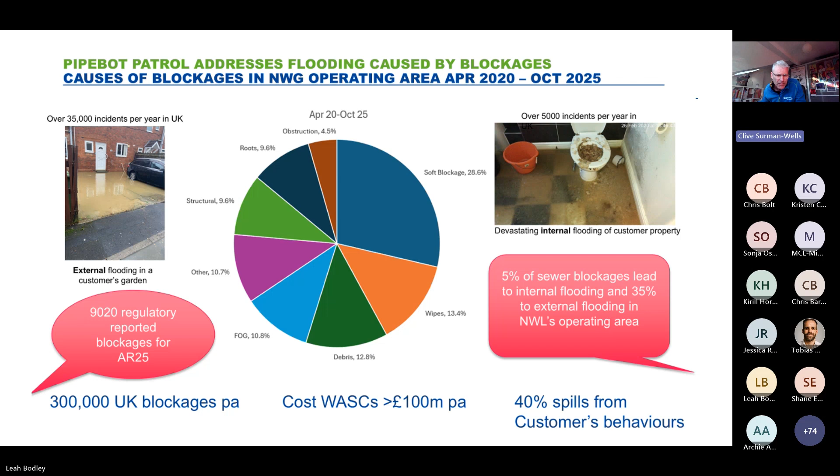So it's not like we don't do anything to address this problem - we've been working on it for years, and a number of fairly effective approaches have been adopted over the years. For example, behaviour change campaigns is one way of addressing blockages. Our Northumbrian Water's own Bin the Wipe campaign encourages people not to put wipes down the toilet. But of course, not everybody complies with a behaviour campaign, and they need constant endorsement - eventually their effectiveness wears off if they're not reinforced.

Another approach to dealing with blockages: if we have an area where there's a blockage hotspot and we have frequent problems, we will create a planned preventative maintenance and routinely send out a team to look in the manhole on spec to see whether the blockage is building up there or not. And of course, that's quite wasteful of resources, because often we'll go out to a site and find that there is no blockage, and therefore that journey was a wasted journey. And blockages can occur in between these speculative inspections.

The final approach that we have is using predictive models. Most water companies will have sewer level monitors, quite large networks in some cases of sewer level monitoring devices. That's a gadget in many manholes that is measuring the water level. And if you see water levels rising at one point, but not rising downstream, then the chances are that there is a blockage between those 2 points. So that's giving new insight. It's allowing teams to react and get out and try and deal with those blockages.

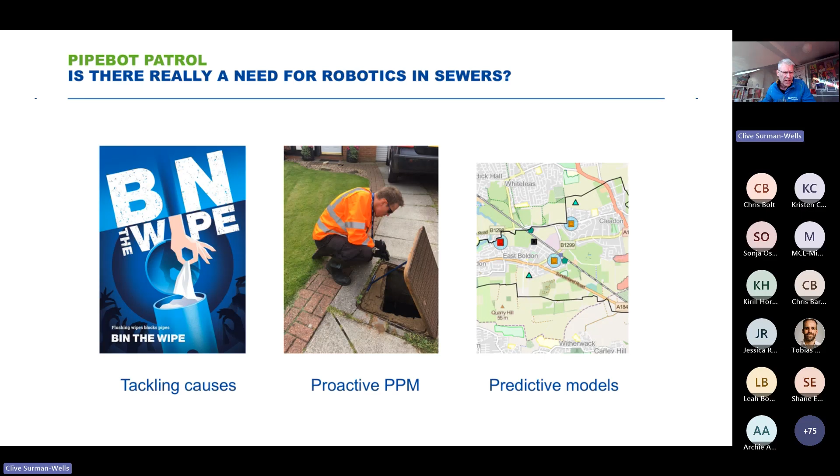Now, we came up with this vision really by talking to the people involved within Northumbrian Water and across the water industry in dealing with blockages and preventing flooding from happening. And the message we were receiving was, if only we could determine the precise location of debris buildup before it actually caused a total blockage that was going to lead to flooding, then we'd have enough time to get out to site to solve the problem and clear it before the heavy rainfall came, for instance. So if we could monitor it in some way and monitor everywhere all of the time, that would be great.

So that seemed like a challenge to us, and we threw our mind to the world of films like Thunderbirds and Disney Pixar's Wall-E, and came up with the concept of, what if we had a sewer crawling robot that literally lived in the sewer and monitored a particular sewer zone the whole time, 24/7, and alerted us to the buildup of debris. That would mean we would learn a huge amount about how a particular sewer zone functioned, how blockages occurred and what they were made of, how they moved through the system, and how they eventually became full blockages, and over what period of time. It will give us a completely new visibility of how that occurred.

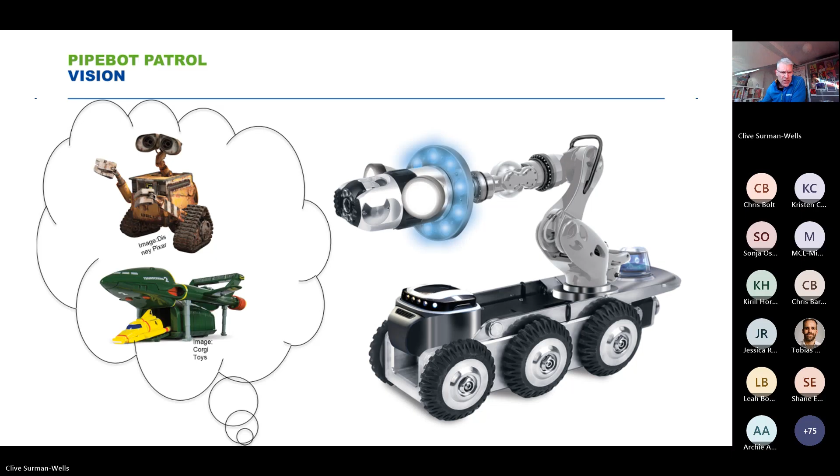So that was our concept, and we thought, well, we could invent a robot that did this. It would have to work autonomously and live in the sewer, as opposed to being put in and controlled by humans. So that is the concept that we came up with, and we converted it into a bid in the Ofwat Innovation Fund, the Water Breakthrough Challenge, 2 rounds ago. And we put forward a proposal to develop this autonomous sewer crawling robot, which is component number 1, that would live in the sewers but would have a dock in a manhole or inspection chamber. That's component number 2. And we could see what it was doing all of the time through a dashboard that would tell us precisely where the build-up was. That's the human interface, the third part of the system.

There was a fourth part of the system in the bottom left that's greyed out, and this is tools for clearing blockages. So we decided to draw a line in our project over blockage clearing and make this first phase of the project about proving the concept that a robot can live in the sewers and survive the harsh conditions, can alert us to the build-up early enough for us to react to it, and that we would add blockage clearing tools in a future phase so that we could actually tackle maintenance of the sewer as well, as opposed to just alerting a human team to come and deal with the blockage at this stage. There's a couple of things to point out on here as well.

That's that big black line that goes between the inspection chamber with a reel in it and a line which is a tether that goes to the robot. So in the first instance of the project, although the future vision was that it should be completely free to roam and perhaps battery powered, in the first instance it should be tethered for a number of very good reasons. But I was advised not to go straight to an untethered robot because it would be too ambitious at this stage.

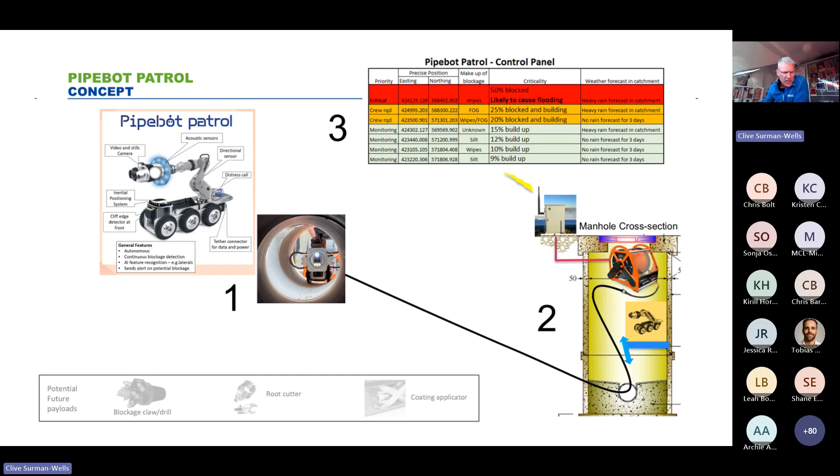The second thing you can see is above the cable reel in the manhole component 2, there's a kiosk on the ground. So if you're going to supply mains power, unlimited power, and unlimited data via a cable, you need a means of transmitting that back. So in the very first concept, the bid we put forward to Ofwat, we said that we would establish 3 zones for testing in the field once we developed the robot, and they would transmit data from a kiosk that will be established. So others in the group will say more about that as we progress on.

The good news is Ofwat Water Breakthrough Challenge did award funding of £1.6 million to the project, taking the total budget to 1.8 million because the partners obviously contribute. It's a 2-year project which started in July 2024, and the main partners in the project are Sheffield University, who are providing robot autonomy and acoustics expertise, Minicam, on whose CCTV crawler the initial concept product has been based, the CRP 140, EMS, who are used in the project to get power and data to difficult to reach places. Northumbrian use EMS for getting data and power to riverbanks for water quality monitoring in rivers, for instance, those kind of difficult to get to places.

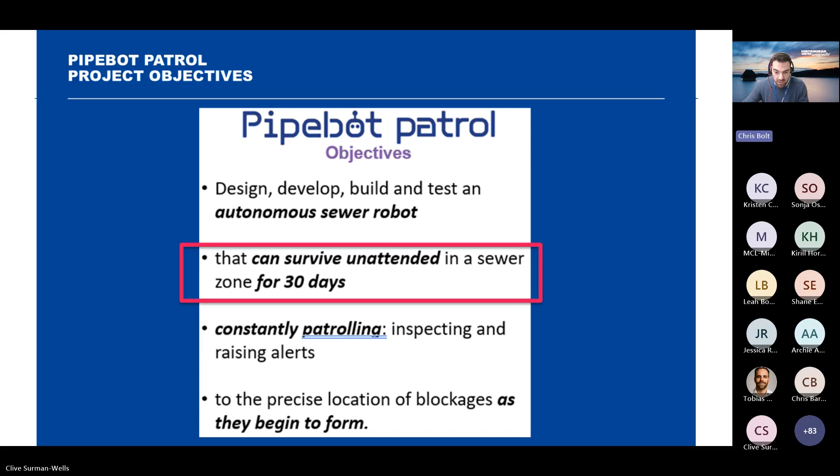Perfect. Thanks very much, Clive. So my job today is to take you through the project timeline and hopefully give you a little overview of how we've progressed and moved along. So for the project, we have 4 phases.

So the pre-phase, as Clive alluded to there, we've done work at the Innovation Festival, which has been a great environment for us to showcase what Pipebot Patrol is all about, to be able to gain a really engaged stakeholder group and also gain some knowledge to really inform what we do going forward. So we were able to do that prior to the project beginning in July 2024, and also some other preparatory activity where we were able to set up project management processes and practices, establish our working group and meeting frequency, and then also everything that we need for collaboration with partners.

And that led us nicely into phase 1, where we were able to sign the collaboration agreement, obviously crucially at the start, and engage in workshops with stakeholders, and also include people internally at Northumbrian Water to get their perspective and opinion on it, to really feed into the development of the robot and the dock as well.

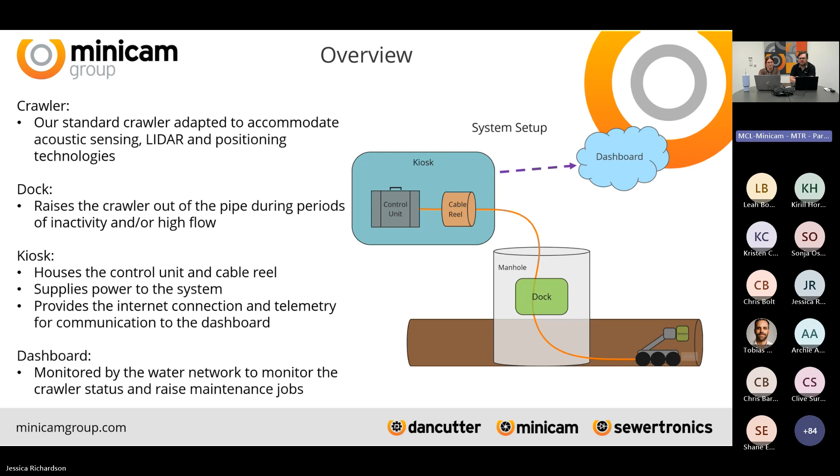Our first task was to integrate all the various sensors into our existing crawler so that the technologies can be used in harsh environments like sewers. We first laid out the criteria we needed to meet, which included positioning microphones in relation to the speaker. We needed a camera and enough lighting to take photos while we're down in the pipe.

to back up what the sensors were finding. We needed to house the supporting electronics on board the crawler, which also included having a LiDAR and IMU sensor. We were optimising the arrangements for 300mm diameter pipes to begin with, and we also needed to make sure those sensors were protected, as well as allowing for data transfer from those sensors up to our control unit that lives in the kiosk. Once we'd agreed the specification, we could then move on to our CAD design.

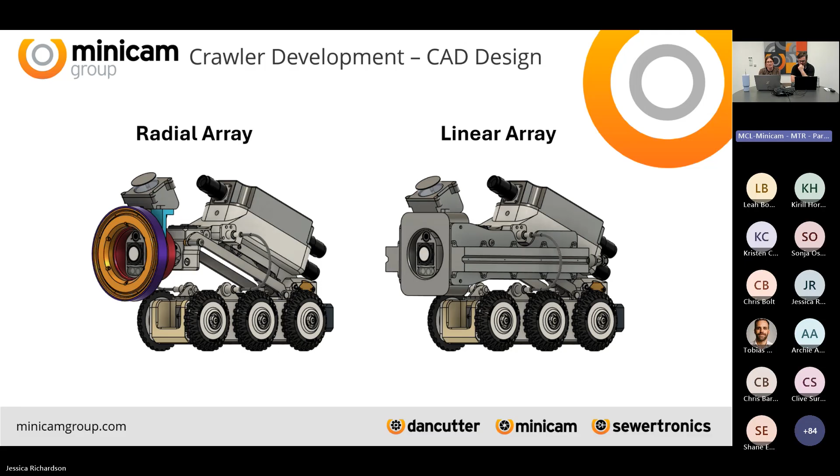Once we'd all agreed on the CAD design, we could move on to our PCB design. So we designed new schematics to make the power supply that we have on the crawler already compatible with all of the additional electronics that we were adding in, as well as designing PCBs for the microphone arrangements and the camera LED interface as well.

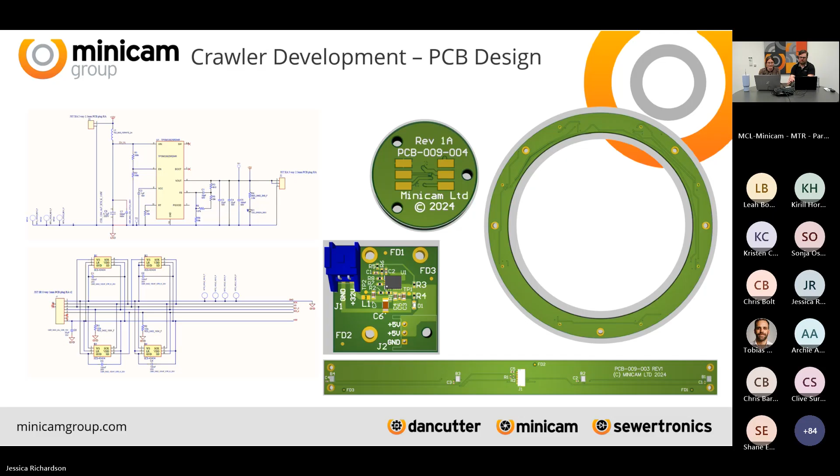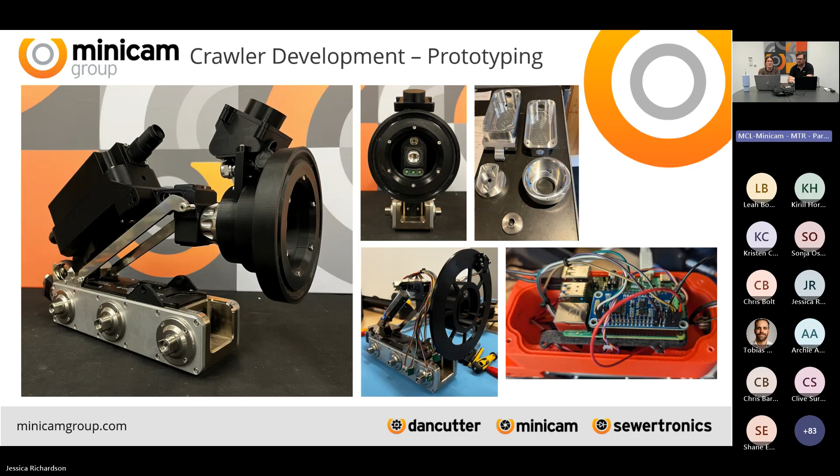Then we could get on to the prototyping stage. Incorporating the mechanical and hardware designs made us able to determine whether our setup will function practically, and then we can make any adjustments and tweaks as and when we need before we commit to purchasing any machine parts.

All of that has brought us to our machined prototype that we can see here, and this is what we'll be using in our first field trials within the sewer network over the next couple of weeks. It's anodized for extra protection in the sewer network, and it's also pressurized to prevent any water ingress. We've also added a more powerful gas strut to stabilize the crawler a bit more to manage the additional weight of the electronics and sensors we've added in.

And then Shane's going to talk you through the dock development cycle as well.

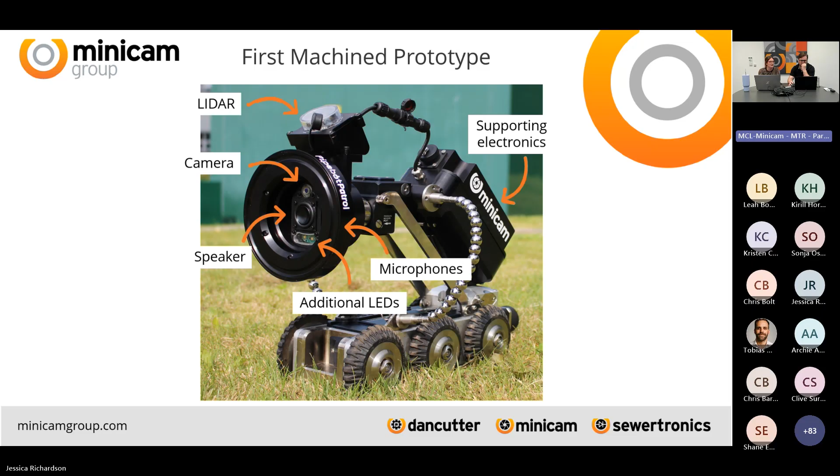So for the dock, we started off with a couple of concepts. I think initially we actually started with concept 2, which is quite a complex arrangement of a cradle, trying to bring the whole thing up as one, sits in the bottom of the pipe. But generally in the world of sewage and wastewater, complex doesn't usually go terribly well. So we pushed for how can we simplify this and make it so simple that it can't go wrong.

And we settled on concept 1, which was a simple rail system where, because we're tethered, you naturally can drag the crawler backwards and it can slide up its rails. No mechanical moving parts, nothing to go wrong, reducing the risk of us being the problem in the pipe rather than solving the problem.

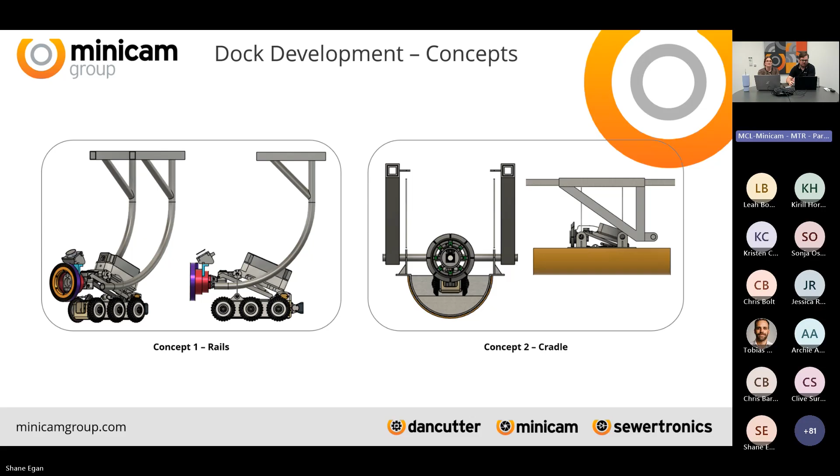So we settled on the design. We then started, as usual, our CAD design, come up with some concepts, design in 3D prototypes, and we first started out with quite a solid design, but realised, well, we all know no two manholes are the same, but they've got much more variability than we expected when we actually went on site and assessed them.

So we started with a modular design with different telescopic rails so that we can fit into a variety of manholes, and a variety of depths of manholes, so we're not actually limited in where we can go. I think the other interesting thing was during some of our testing, we realised we needed to reduce the friction on the handles. So we again found the simple solution. Don't overcomplicate things. We went for beads on the handles to reduce the friction, so it can slide nicely up its rail system.

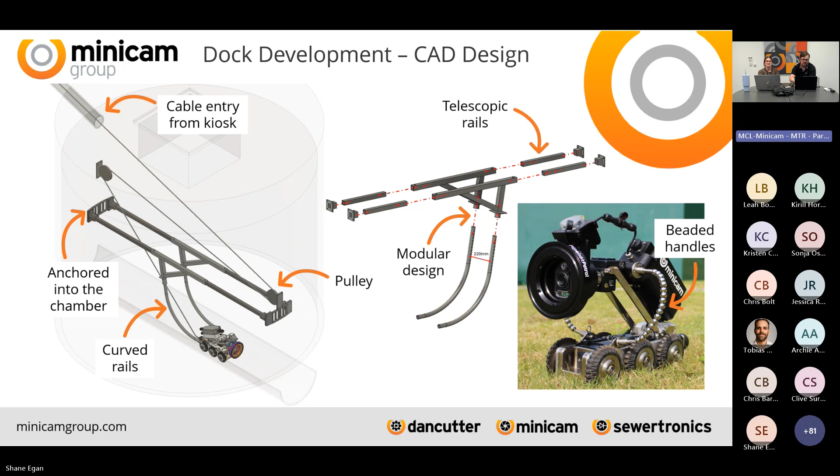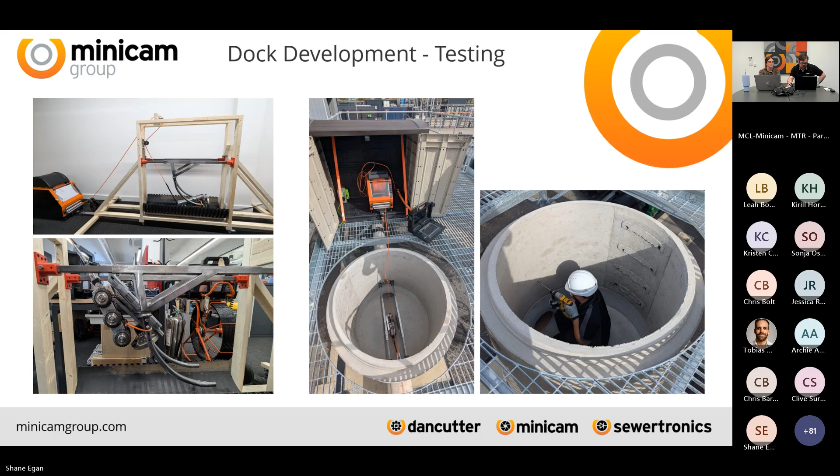And then here's a short video just showing the action that the robot takes. So hopefully that plays. It does.

Very simple: it drags itself up, does end detection at the top, and then the crawler will sit there, and the way the cable wheel's designed means that will stay there for as long as we need. In the event we want to do a survey, it drops down the rails, it's in the bottom of the manhole, and then it will continue through. We've also incorporated guide rollers there to do cable management so that we're not causing problems with the robot tangling itself and causing more problems in a sewer that we're trying to solve problems in.

I think we are on to Carol's section now.

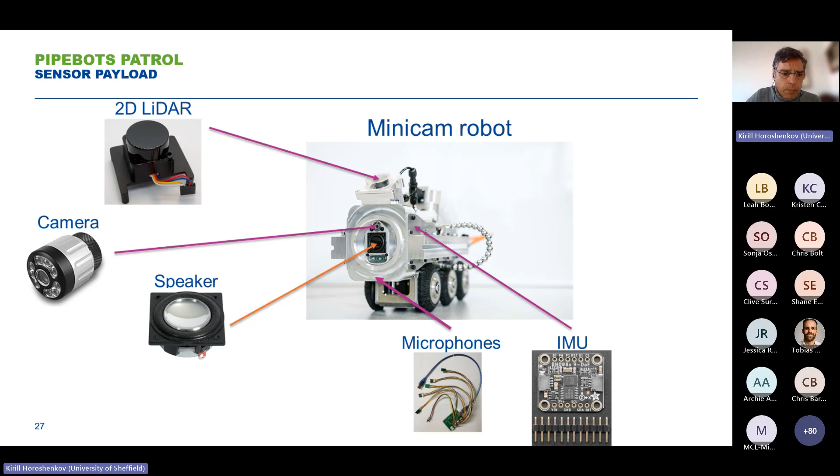So all the sensors provide a reasonably low amount of information so that the signals can be processed in real time. So the robot, which may travel at a speed of a few centimeters per second, can actually make decisions by itself.

Is there a blockage? If there is a blockage, can I pass it? If I can't pass it, where do I need to stop? And shall I go back and report it, and so on and so forth.

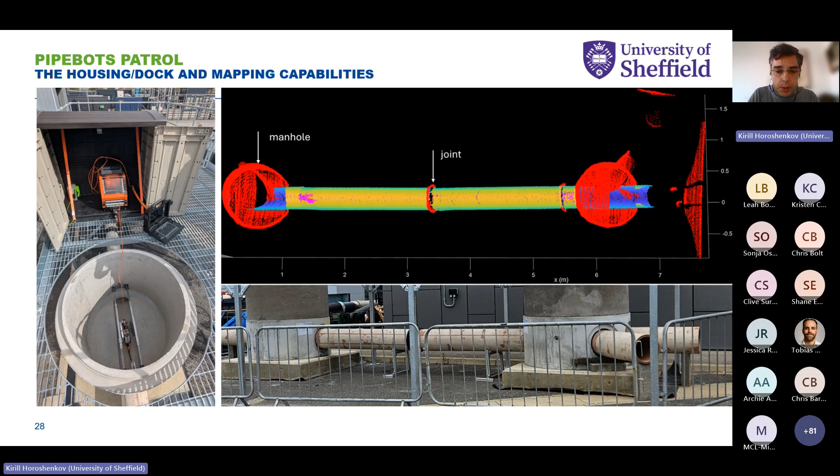I'll show you a video. Basically, just an example of a blockage which we put deliberately in the manhole. So the robot will come out, detect this blockage, and make a decision to go back. So what you see here is all autonomous.

There is no human being sitting in front of the joystick. All the decisions are made by the robot's brain, which is basically a Raspberry Pi.

So it comes out, it detects the blockage well before it can see it. So it comes close enough—you can see the spinning LiDAR in front of it. The spinning LiDAR estimates the blockage is too big for the robot to pass over, and it just retreats back to its original position.

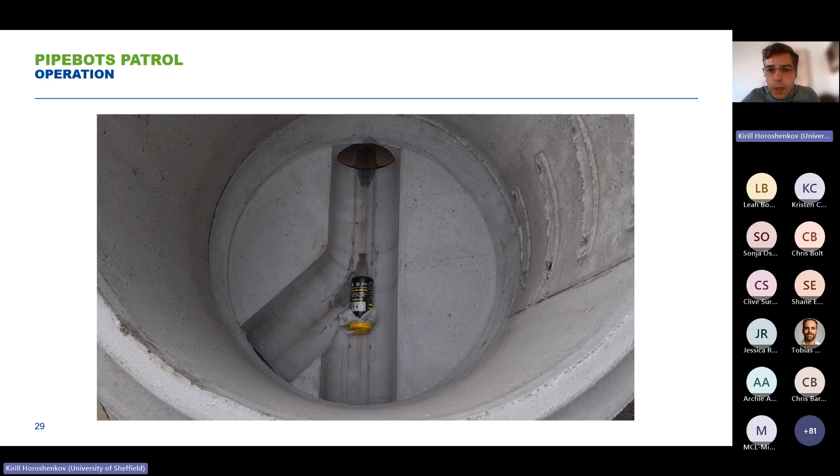Thank you, Carol. Hello, I'm Sonja Ostojin. I'm Head of Innovation in the company Environmental Monitoring Solutions, now Cura Terrae. So our role within this project was to enable and ensure secure data flow.

So requirements were to provide secure data connection, remote connection to the system, receive diagnostics and positional MQTT messages from the robot, receive files from the robot including video and image files and LiDAR sensor data, and handle kiosk door alarms and gas sensor data. To do this, Cura Terrae installed a router that uses GSM signal to provide data connection.

The router acts as a gateway device, allowing for a secure VPN connection on the network and inside the kiosk. The router provides data connection to all devices in the kiosk, either via Wi-Fi or Ethernet, including the MCU, which is the control unit, the minicam, and the Raspberry Pi, which sits on the robot.

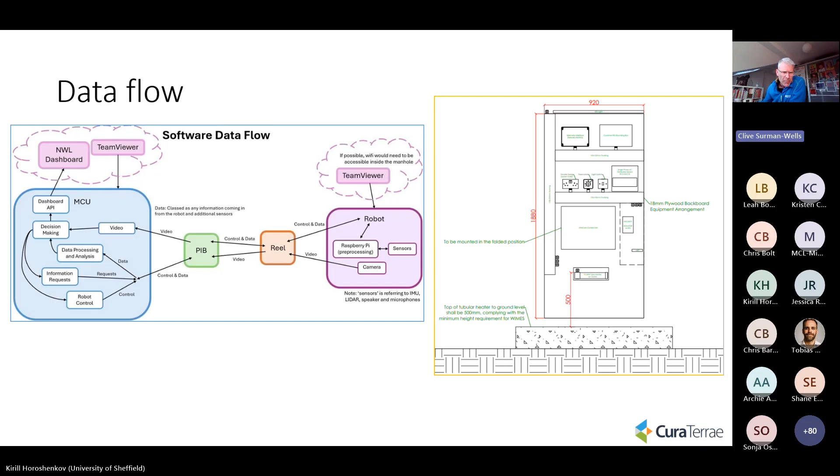So let's just have a high level view. These aren't learnings as such, these are conclusions that we have drawn that are being fed into the next phase of the project. Remember our goal here, we've realized there are many other opportunities, and we've seen one or two of those flashing by in the chat - you know, could it do this? Could it carry that sensor? Yes, it is basically a mobile sensor.

That's what it is at heart, and we are proving it can survive the harsh environment of the sewer, and that it can be truly autonomous even in its current tethered format. The idea is absolutely to lose the tether in future, because the tether becomes a major constraint. One of the biggest problems preventing scaling and adoption of this in wide scale across the water industry...

...is the fact that at the moment, in its current form, you'd have to build a kiosk next to every launch inspection chamber. That is just not feasible, that is never going to work. So the other thing is the tether becomes a massive constraint because of the distance limitation it imposes. Theoretically, we should be able to go way further than the tether would allow us, and branch and go around the sewer in multiple directions. But the tether constrains that at the moment.

But that's no problem, because we only introduced the tether, remember, to give ourselves an unlimited power and data supply, so that we can then size the batteries in the next phase and come up with a suitable means of communication for wireless in future, knowing the volume of data that's needed.

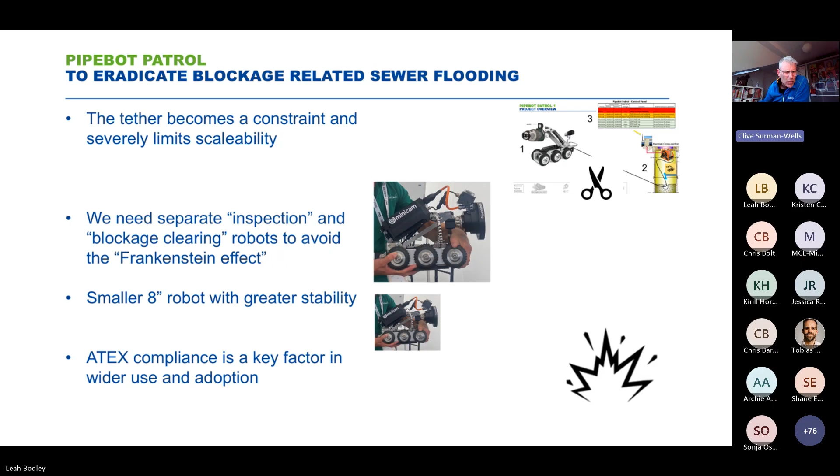Some ideas about how the battery to battery charging could work. Remember, we can't have mains power in manholes. It's just not scalable. It takes too long anyway. So we've come up with an idea borrowed from the world of e-scooters, where a human changes the carousel of batteries that power the scooter in that case, but in this case, a robot.

So we're thinking of a modified chamber lid with a carousel of batteries that are used to charge the small batteries in the robots inductively, and that it will be a lockable, alarmed manhole cover. And again, remember that the robot spends little time in the chamber. It spends its time roaming around the sewer network. It only really comes back down to charge its battery in the future. It can transmit data from where it is, whether or not it has a tether on it.

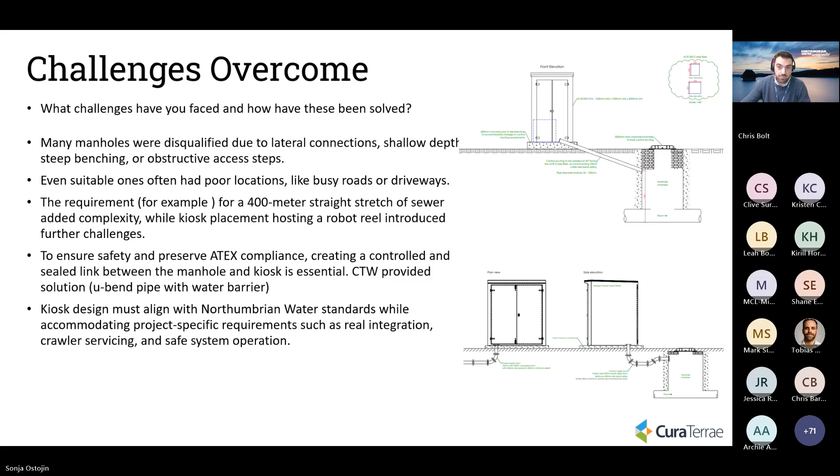So next is Chris. Yeah. Perfect. As Sonja said, probably best to touch on.

I joined kind of partway through the project, and it has been a really great experience because we've got such engaged stakeholders in this project that are really motivated and passionate about the work that we're doing and the kind of capabilities that we've got. So that's been really great for me to join and be part of and welcomed in. And I've certainly enjoyed benefiting from the team's really in-depth subject knowledge, which I think has also been a key point.

I think for us internally at Northumbrian Water, we've been able to engage with lots of teams, people in the business, to speak in different forums, and really to make sure the business is aware of the project and what's going on. And then people have been able to ask questions, to engage, to bring points and say, well, actually, what about this? And as Sonja just said about the site selection, something that we've been able to set up is a technical steering group.

So that uses our sewer technicians and technical advisors, and we're able to update them on the project and then gain their knowledge, their experience, particularly around things like site selection. They're out in the field a lot of the time and know the practicalities of the locations and manholes. So we've been able to utilise that to really help us push on with site selection.